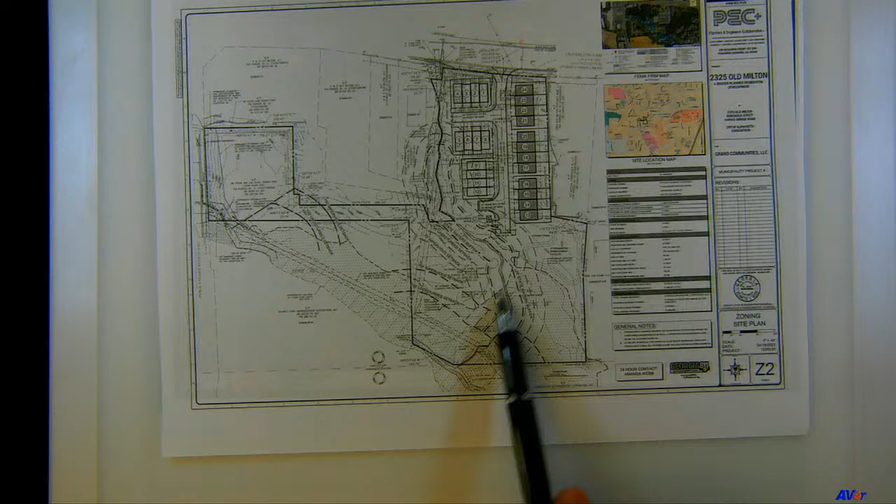I'll take you to the site plan. So there's a perennial stream that runs approximately in this location that has buffers that encroach on this property. And then there's also a non-perennial stream, the stream with the smaller buffers, the 75-foot buffers that runs kind of north-south through the property. And then this cross-hatched area throughout the property that you can kind of see in this general area, that's floodplain. A lot of impacts to this property.

The applicant is requesting to allow for some stream, buffer, and impervious setback encroachments. It's approximately 0.25 acres. They do propose setting aside an equivalent amount of buffer and impervious setback on the property, and I would like to show you what that looks like as proposed by the applicant.

So this document is part of the applicant's application. They show the impacts from the construction of townhomes on this property to the impervious setback, that's the outer 25 feet of the non-perennial stream. And then also the impacts to the 50-foot undisturbed buffer, which is the buffer right inside that impervious setback.

That totals about 11,000 square feet, a little over 11,000 square feet of encroachments. And what they show here in red is meant to be the equivalent amount of area for buffers.

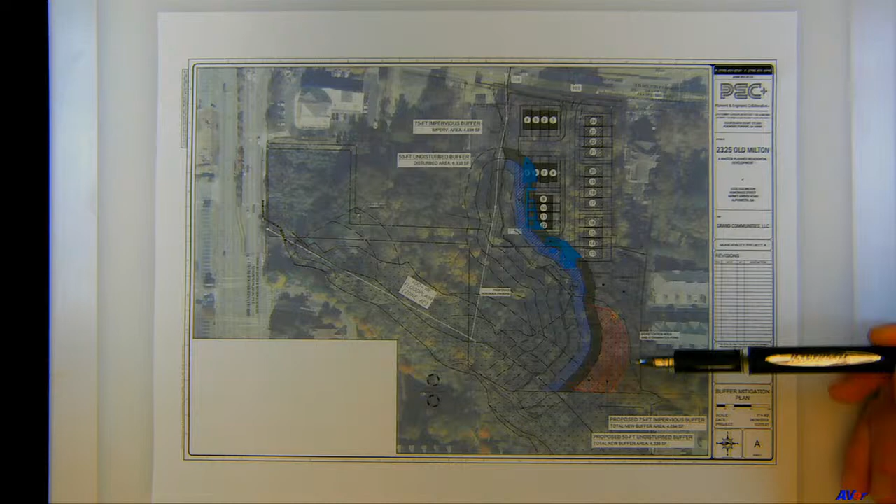We have a condition that relates to the proposed mitigation for the stream buffer encroachments, and we do indicate in that condition that this set-aside area for additional equivalent amount of buffer area should be outside of floodplain. So you can see at this area, it's actually overlapping the floodplain, so they'll need to find another area. There's another area here that's not already buffers, that could potentially be an area that they could set aside as additional buffer to offset.

Of course, we looked at the densities. The density of 3.9 is much lower than any densities that have been approved in the downtown. There are just a couple exceptions. There's one exception along the Way Hill development along Cumming Street that had a slightly lower density, but most densities that have been approved in this particular area under this zoning district, downtown live work, and along Old Milton Parkway have been closer to 7-8 units per acre.

And we'll go back to the site plan. Utilize the applicant's color site plan to go over the site plan. As I mentioned before, 24 for-sale townhomes.

These townhomes are front-loaded, so these are the ones with the variance. So half the townhomes are front-loaded, and the other half are rear-loaded. Even units 9 through 12, which front on an open space, are considered rear-loaded at this location. They have the sidewalk in the front to indicate that this is the front of those units.

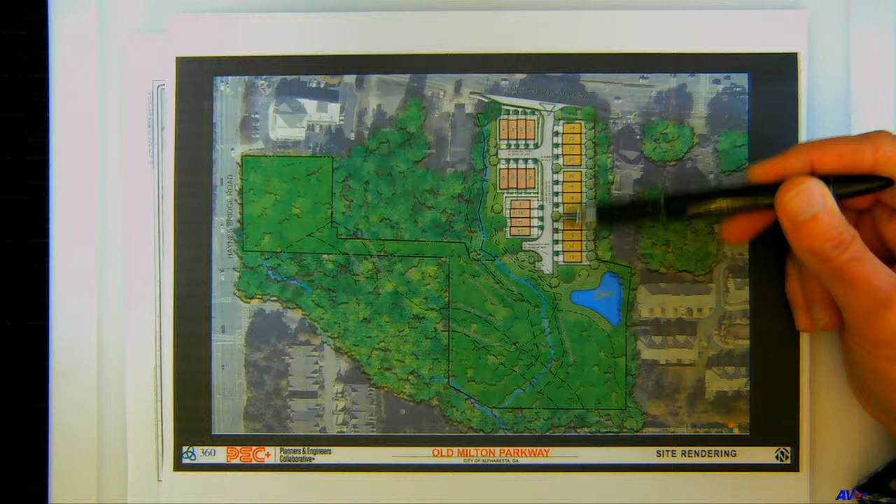As you can see from the site plan, access is off of Old Milton Parkway. The variance requests to modify the streetscape standards. As you can tell, there's a sidewalk only on one side of the street here. There's no sidewalk on this side of the street currently, as shown on the site plan.

Quickly just go back to this site plan. This site plan does show a 10-foot building setback along Old Milton Parkway. The downtown live work zoning district does allow for a minimum 10-foot setback.

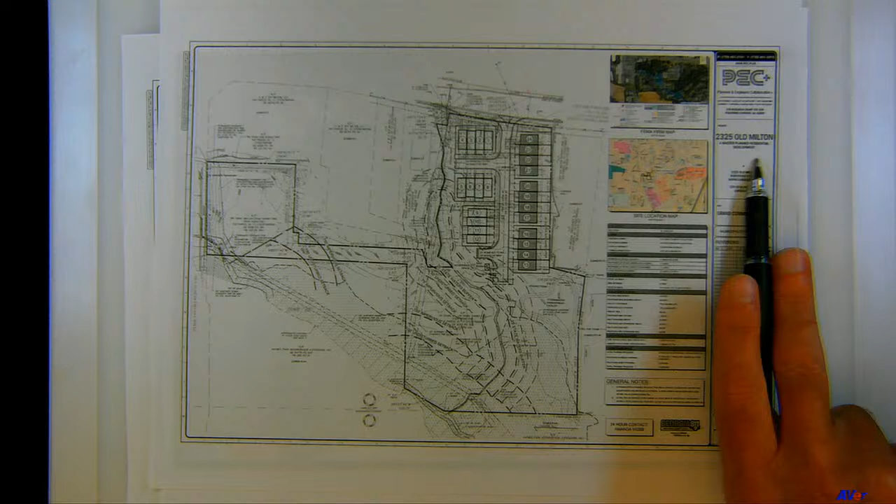However, we have placed conditions on most developments along Old Milton Parkway to have the 20-foot setback with the 20-foot landscape strip. The only exception to that is the Chelsea Walk development, a couple parcels over from this along Old Milton Parkway. They actually touch back here on the lower end of the property. Chelsea Walk was approved with a 15-foot setback on Old Milton Parkway with a 15-foot landscape strip.

Chelsea Walk was one of the first to be rezoned under the downtown live work along Old Milton Parkway. All other developments that have been rezoned along Old Milton Parkway in this area have the 20-foot setback with the 20-foot landscape strip.

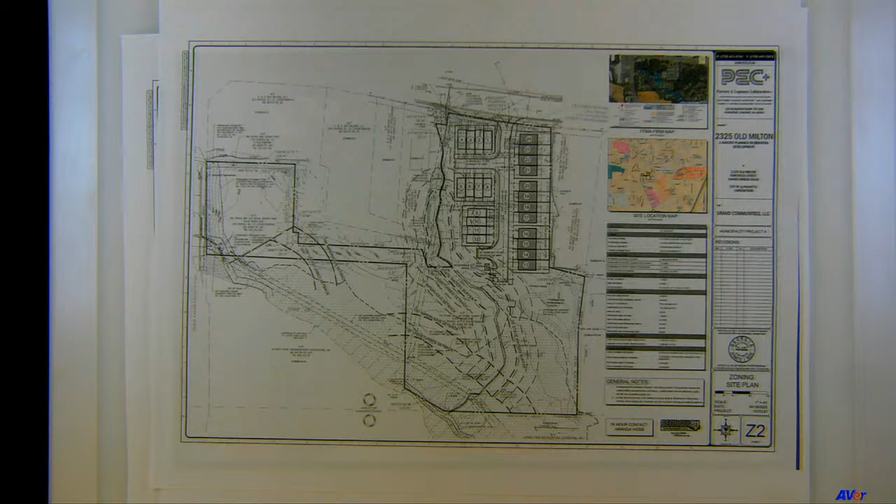The rear-loaded units, so these units here, go back to color. These units here, the rear-loaded, are 20 feet wide. The front-loaded are 24 feet wide townhomes.

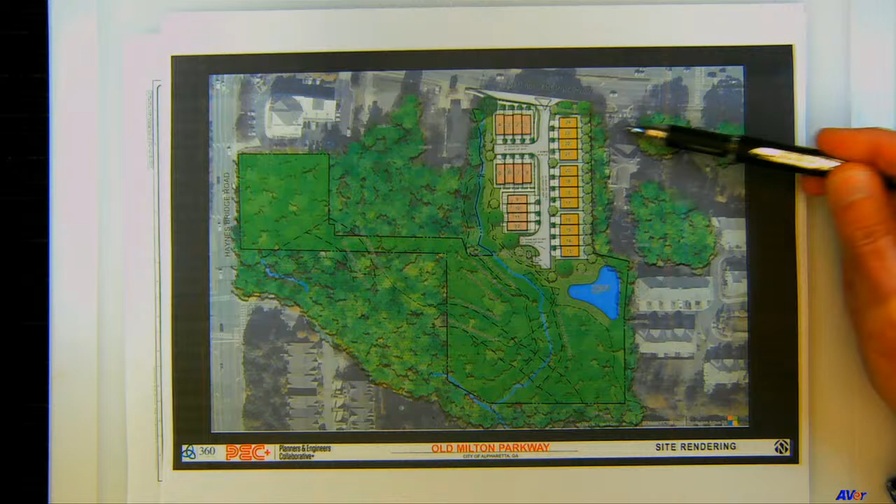The applicant does show a 20-foot planted buffer along this property line. There's an existing plastic surgery office building at this location here. So this was offered by the applicant.

In our code, if we were anywhere else in the city except for the downtown, we would require the for-sale development to be responsible for the 50-foot undisturbed buffer. Remember, we require buffers between residential and non-residential, and typically the buffer is going to be on the non-residential side of the property. We did change the code in the general UDC so that if a property rezones for sale and they're adjacent to commercial, they have to provide the buffer.

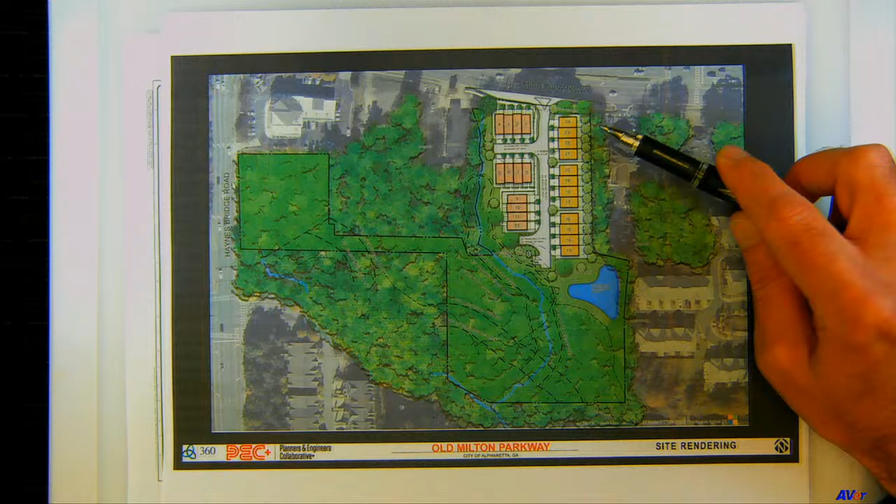We did not change that code for buffers in the downtown. So they do not have to request a buffer variance for this side or for this side where they abut non-residential. Buffer is not required there only because the property is in the downtown. But they are showing a 20-foot planted buffer here, and we do have some conditions for a row of evergreen shrubs to buffer them from the adjacent daycare.

Each of the townhomes has the code-compliant 2 side-by-side parking spaces within the garage. They also have the code-compliant driveway, 18-foot long driveway with 2 additional spaces. Downtown code would require a total of 60 spaces, so 2.5 spaces per unit - 2 spaces per unit with a half space addition for guest parking. That again calculates out to 60 parking spaces.

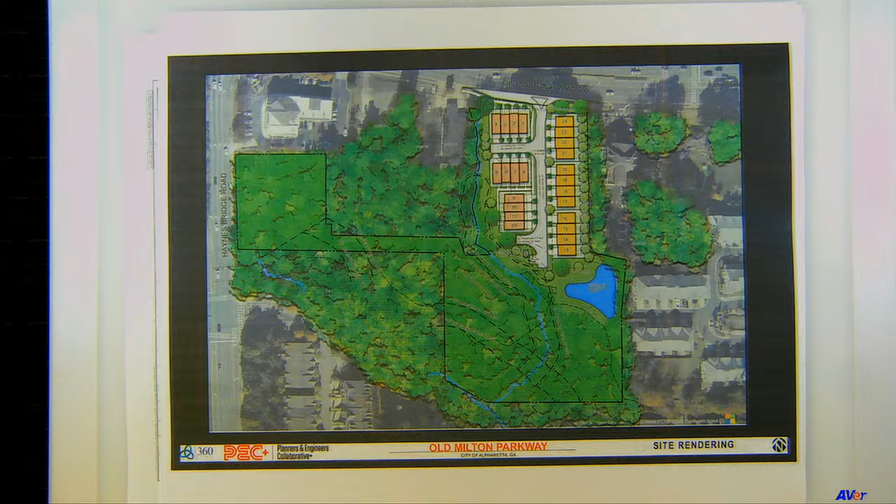There are 98 parking spaces on the site, 96 of which will be in garages and driveways, and 2 additional guest parking spaces at the end of this street near the mail kiosk.

The applicant identified on the site plan 1.35 acres of open space. That's 22% open space. A total of 20% open space is required in this zoning district, 10% amenity and 10% civic. There are 2 pocket parks that are identified on the site plan.

There's a pocket park identified in this location as well as here near this stormwater pond. They also propose some bioretention area, and I've been told by the applicant that it's both a pocket park, a bioretention area, as well as a stormwater management facility. So all 3 of those things will be occurring in this location.

The applicant indicated on the site plan that the civic space would be addressed with a creekside greenway. That's not particularly called out on the site plan. However, we did believe that there was sufficient area for them to meet the minimum requirement for civic space.

So even though they're not depicting a trail or something within the creekside greenway, we do believe that they can meet that requirement for open space.

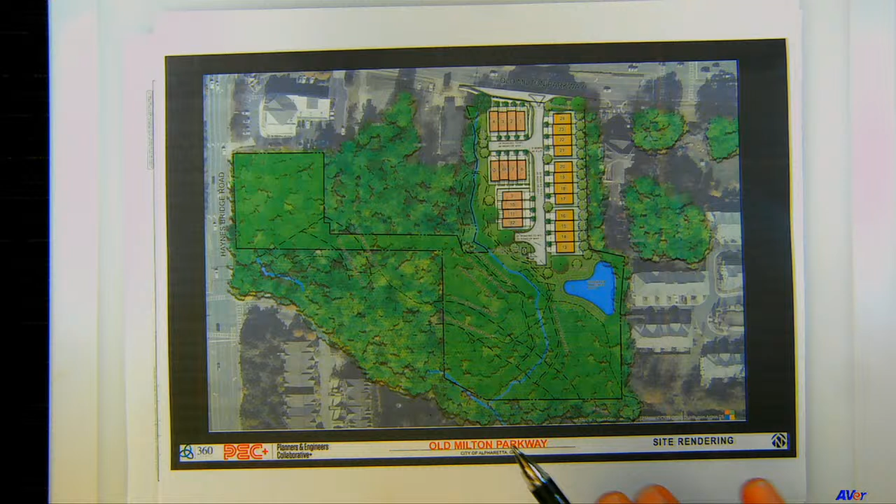There are 24 specimen trees and trees of quality called out in the applicant's arborist assessment, and of those 24 trees, they're only requesting to remove 6. Remember, there's 3.1 acres of stream buffer and floodplain on the property, and all the trees in those areas will remain as well. So there's quite a bit of tree save that will occur on this property.

And then, as I mentioned, the stormwater pond is in this location, and there's a bioretention area proposed near that.

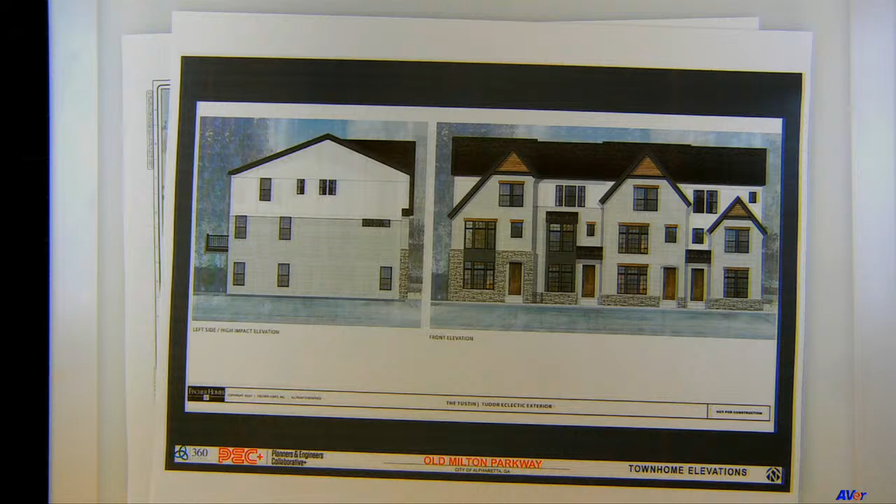The applicant proposes 3-story townhomes in the Tudor eclectic style, which is an approved style in the downtown. The elevations I have on the overhead show a rear-loaded example of the product, combining brick with stone, board and batten, and siding accents.

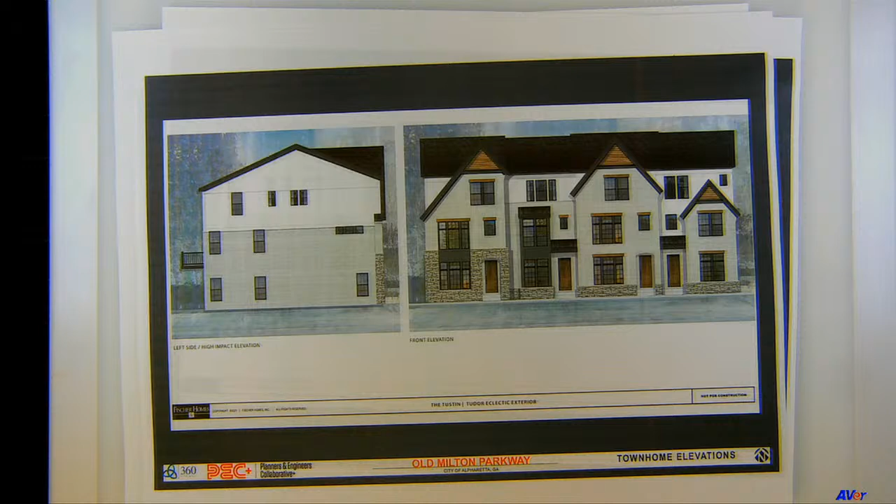When we looked at this application, we looked at the established review criteria for rezoning and variance. We do think that the zoning proposal is consistent with the vision of the downtown master plan as well as the future land use designation of the property. The proposed density is well below densities that have been approved in the downtown.

We do recommend, if approved, that we see the building setback and landscape strip, the 20-foot standard that we have previously approved along Old Milton Parkway.

As I mentioned in the staff report, one of these is incorrect. I did say it is consistent with the setbacks and landscape strips at the Foundry, Chelsea Walk, Wellstar, Northside Hospital, and 1 Alpharetta City office buildings. All of those have 20-foot building setbacks and landscape strips except for Chelsea Walk, which is actually 15.

As it relates to the variance request, we believe there are exceptional conditions on this property due to its unusual shape, topography, and presence of stream and floodplains. As I mentioned, 3.1 acres of the property is unbuildable due to the presence of stream and floodplains.

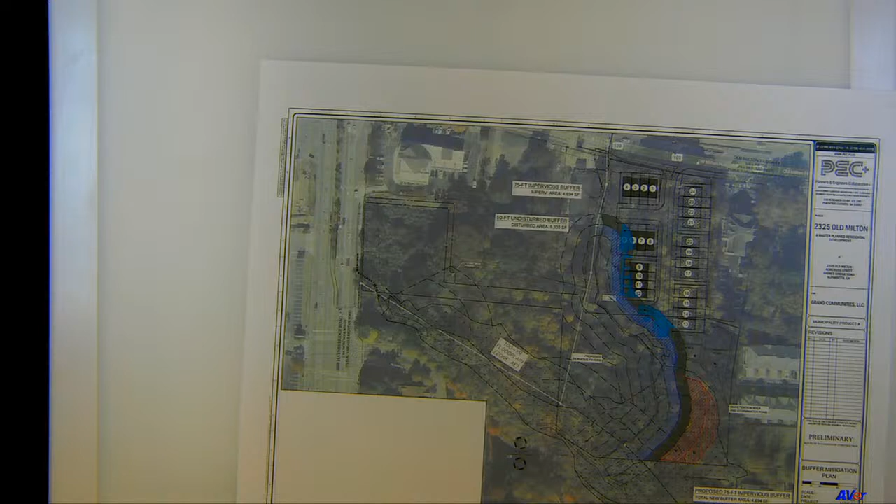There is an additional sentence added to the end of condition 1, which states any development proposed on the property fronting Haynes Bridge Road shall require site plan approval from City Council. I know there's been a few questions about the portion of the property along Haynes Bridge Road. There's no development proposed here currently by the applicant, so we added that sentence to condition number 1 so that if future development was proposed here, it's not just done administratively, but has to come back to council for approval.

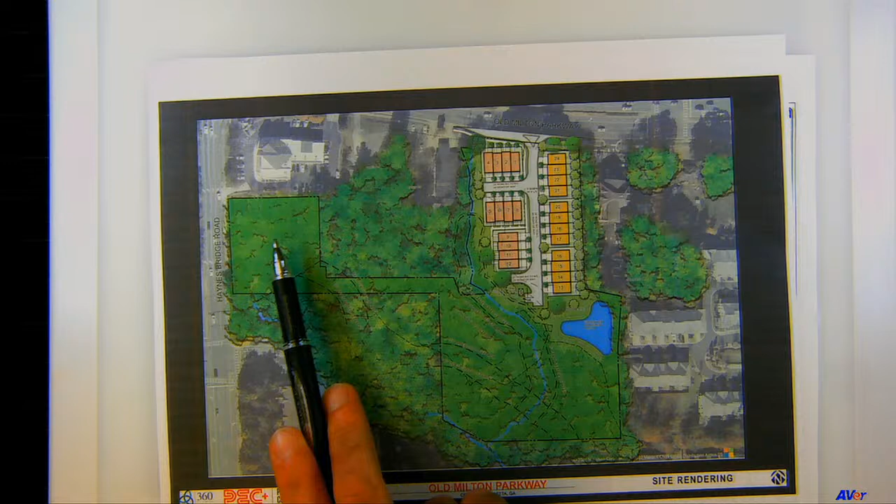Condition 2 ties the architecture and materials on the elevations and renderings that I showed to you, and also states DRB approval. Townhomes shall have 4-sided architecture, materials, and details. The townhome side elevation facing Old Milton Parkway shall have a porch or other significant projection to give the appearance of a front elevation as approved by DRB. So that's specifically talking about this side elevation facing Old Milton Parkway.

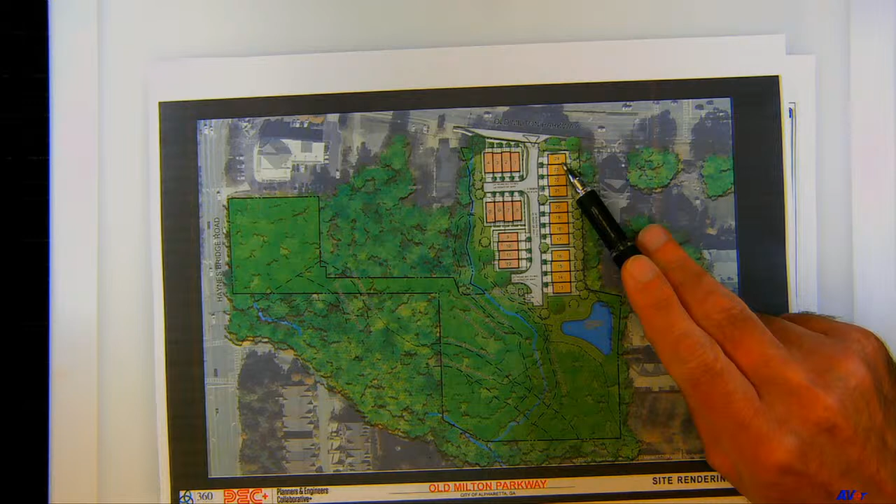Condition 3 addresses the density. Condition 4 allows courtyards to encroach into landscape strips, contingent on meeting the minimum landscape material requirements as approved by staff. Condition 5 is the streetscape requirements for Old Milton Parkway, a 4-foot planter planted with street trees.

Of course, that's subject to GDOT approval. This is a GDOT right-of-way, so they do have to approve those trees, and they typically don't like trees in their planters. Minimum 8-foot sidewalk and decorative pedestrian lighting with final approval by staff.

Condition 6: streets, alleys, and sidewalks internal to the site shall be developed as depicted on the site plan prepared by PEC, dated 4/19/22, with final approval by staff. Decorative pedestrian lighting shall be required throughout the development. Internal streets and alleys shall be private and maintained by the HOA.

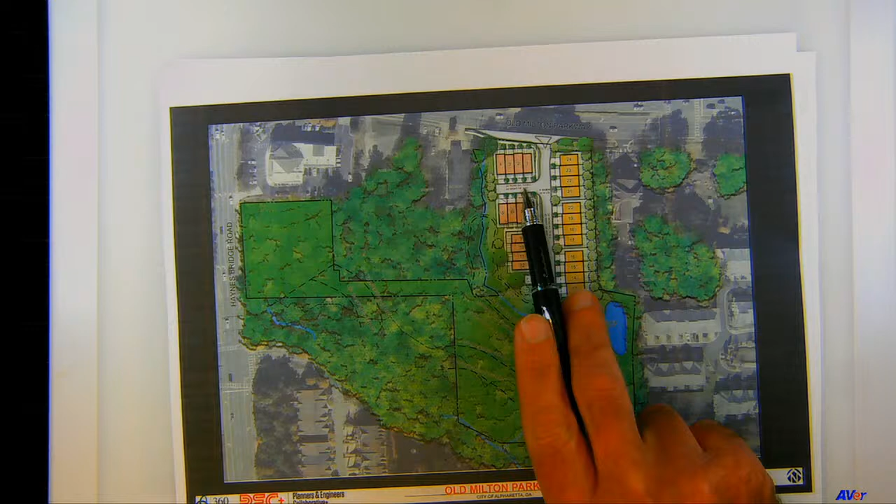Condition 7: a minimum 10-foot landscape strip shall be required along both sides of internal streets, not including alleys. This is the only alley here, so the 10-foot landscape strips are along the street here.

We do have the caveat in the second sentence of condition 7 due to the issues we're having with Fulton County right now with regard to unencumbered easements for water lines. We have that sentence in there to address that condition. Condition 8: a minimum 20-foot landscape strip, building setback shall be provided along Old Milton Parkway.

Of course, the landscape strip shall have shade trees, a continuation of what's been planted and designed in the downtown. Condition 9 addresses the 20-foot planted buffer along the east side of the property, tying it to what's shown on the site plan. The second sentence of condition 9 asks for a double row of evergreen and hardwood trees and shrubs to be planted along the east property line in this location here.

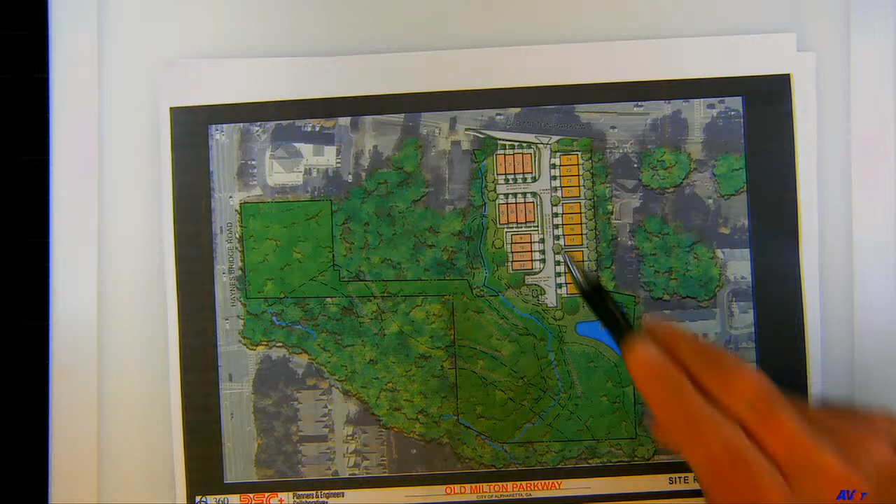Condition 10: the project entrance shall include a decorative paver apron, landscaping, decorative low wall, and/or fencing with columns as approved by staff. Condition 11: open space shall be developed substantially similar to the site plan prepared by PEC, dated 4/19/22, as approved by staff. Open space shall be developed with a park-like setting with decorative landscape, hardscape, and seating. Landscape shall include plant selections promoting the historic district. Condition 12: creeping vines shall be planted to cover retaining or low walls as approved by staff.

Condition 13 is the tree condition. Since they made their request based on the trees they were removing, we identified the specific trees that could be removed—no other trees other than these.

Condition 14: fences and walls visible from the public right-of-way shall be decorative as approved by staff. Unfinished wood fences and decks shall not be visible from the street. Condition 15: HVAC and similar equipment shall not be visible from the public right-of-way.

Condition 16: garbage pickup shall be from within the development. Condition 17: no more than 10% of the residential units shall be permitted to be rented, as recorded in the HOA's declarations and covenants. Condition 18 is the stream buffer impact mitigation condition.

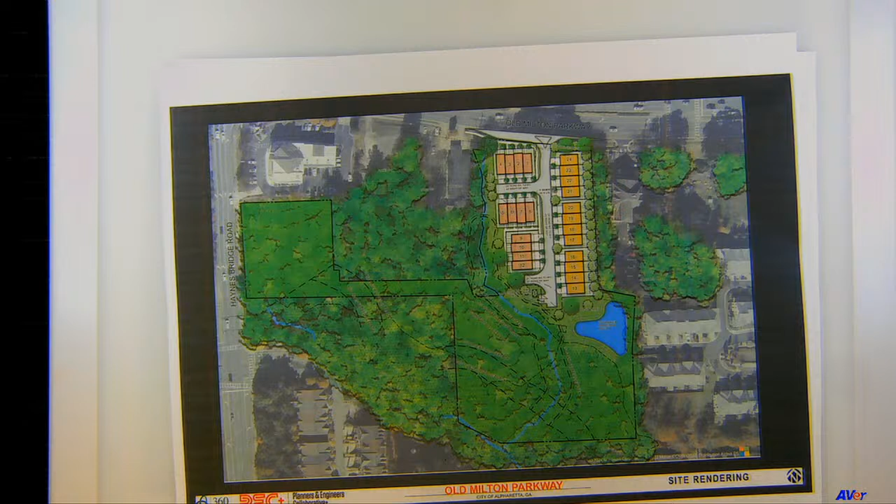Thank you, Michael. I just want to make an observation very quickly before we ask questions, regarding the eloquence of our staff in presenting an application like this. It's not an easy job to be so thorough and so detailed and eloquent in your presentation. So I appreciate the way you and Kathy and everybody else presents. That's much appreciated. Are there any questions for Michael?

Michael, I just got a couple of questions real fast. One, just from a technical point of view, you didn't put 24 townhomes into all the conditions—you have a discussion. I know you limited it to 3.9 units per acre, but you didn't define 24 in the conditions. I was just wondering, was that intentional?

We typically base it on the density, and that will get you back to the 24. It's also limited to the site plan too, which shows the 24 there. So that's why we didn't specifically call that out.

I didn't know. And then going back to the square piece on Haynes Bridge, do you know what that acreage is? Because it kind of affects density at the end of the day. You look at the 24 and it does have a lot of circumstances. I'm not saying I don't understand there's a lot of hardship on the property, but it just looks like someone's going to come back and create commercial on that, right?

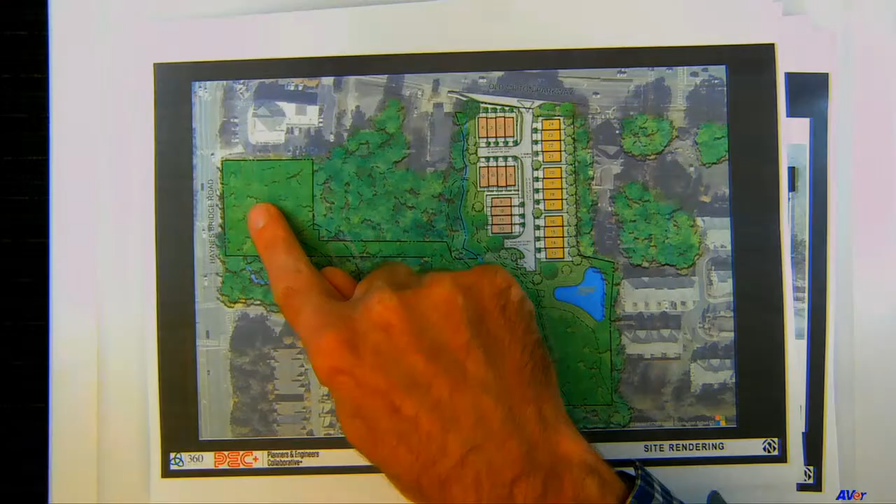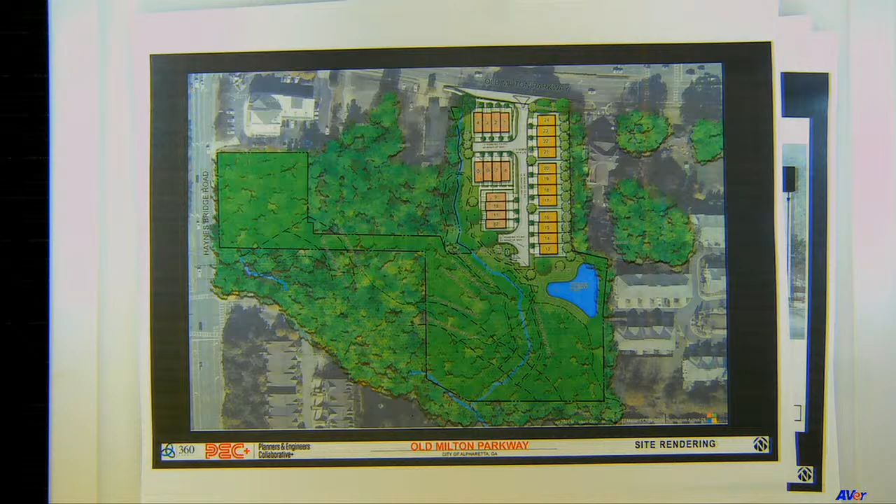So that's a little bit misleading—well, I shouldn't say misleading, but there might be development coming on this parcel in the future, which may increase the density. I was comparing this with the other developments in this area; it's like the third lowest, and that's why I thought maybe it wasn't. It's just based on the total area of the property, so the commissioners can note that. All right, any further questions?

Question on the stream and the setbacks, the buffer setbacks. I didn't see anything in the report so it must not apply, but part one is: is any of that stream supposed to be piped, or do they just want to encroach closer to the stream? None of the stream will be piped as a result of the encroachment that they're requesting.

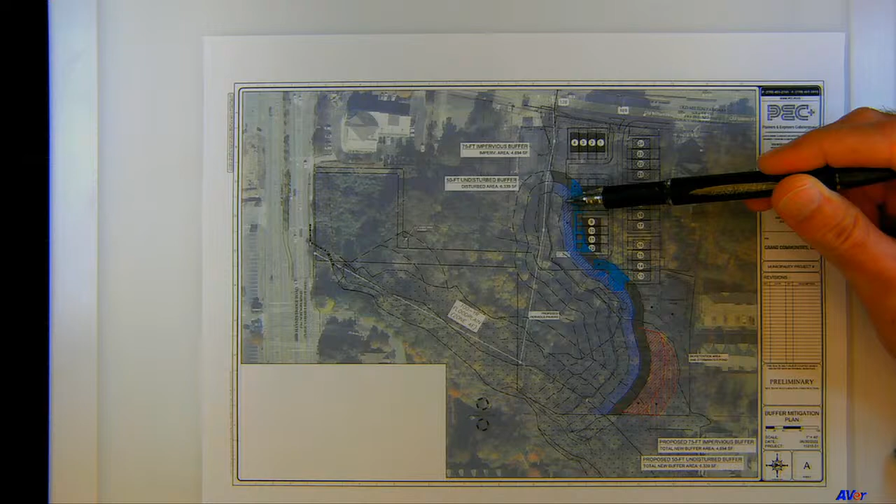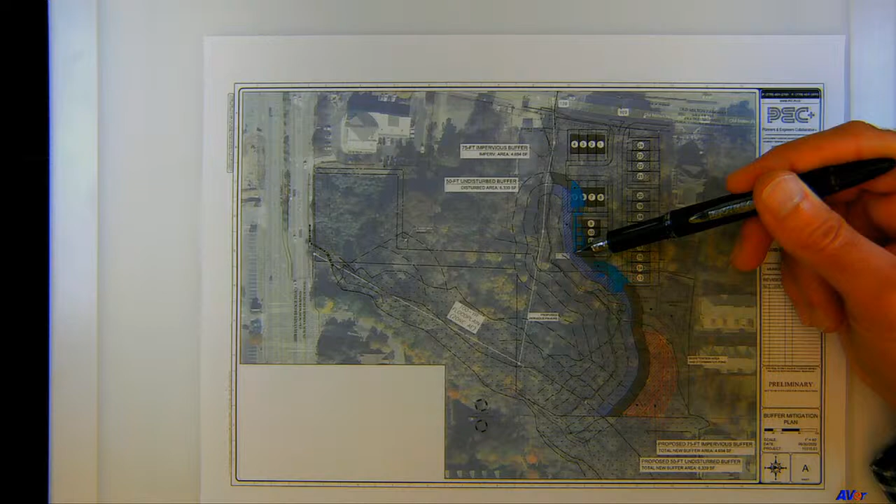So all it means, Commissioner Perkins, is that in this area, for example, they call out the areas where they encroach. This outer 25 feet is referred to as the 75-foot impervious buffer, and then the 50-foot buffer is the next lighter blue area. They show the encroachments just to determine the total amount of encroachment in those areas, but basically the buffers get less in these areas, going down to the point where they stop the encroachment, and they'll find other areas to make up those buffers on this property.

One of the other things—the neighbors had indicated in one of their letters that there's some flooding already. Has that been brought to the city's attention? Has that been discussed at all? There was, I mean, it was in a letter. Other than what we received from correspondence—email, letters, or things stated at the community zoning information meeting—I don't have any knowledge of particular flooding in that area, and it was not brought up by our stormwater engineer as part of her review.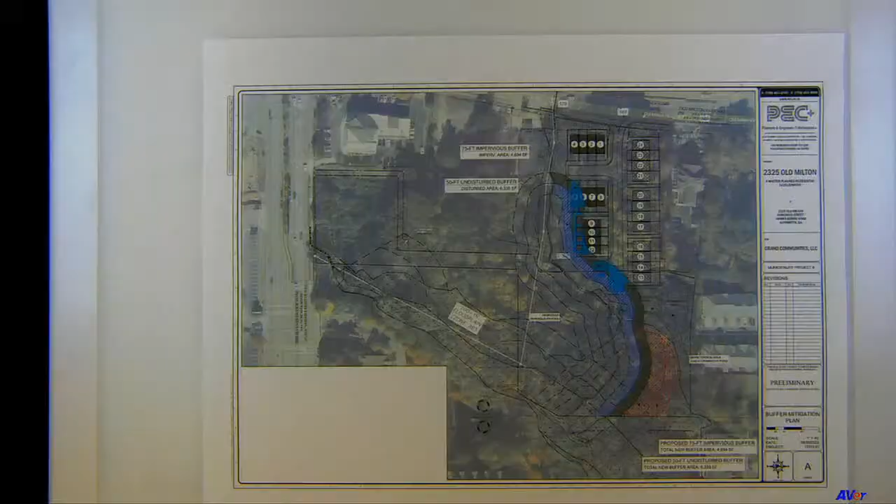I just had one follow-up question, Michael. So in this plan, I understand that left parcel on Haynes Bridge, but there's no access being granted up through there for this development? We're not touching that whole side—there's no road improvement on that side. It's completely left alone. They're not proposing access here, whether vehicular or pedestrian, at this time through this area.

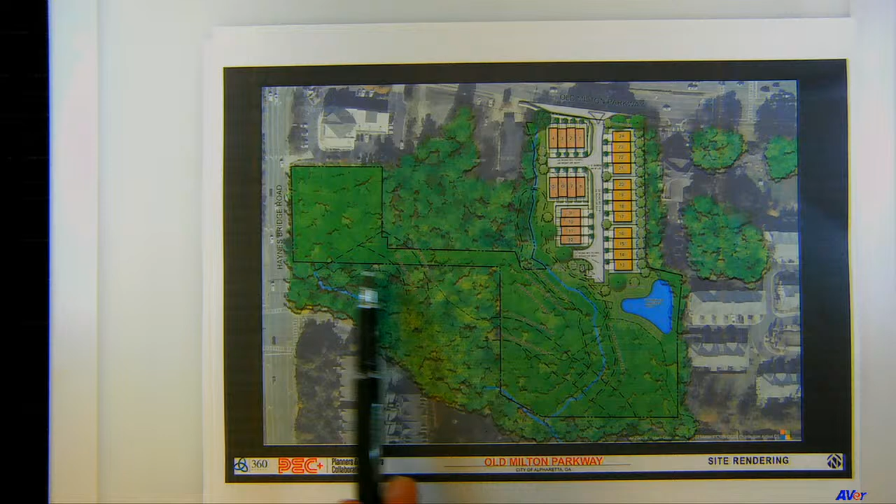And is that a normal condition where you added that sentence on number 1? I haven't seen that before. We have—I've found some old zoning conditions that include that, and it requires... there may be some undeveloped land on a particular property. Does that happen on the regular, where we have developments where portions of the property are left undeveloped? Usually we see the full build-out on a site plan like that, but there are some instances where we've had that, and the condition will specify that new site plans would have to go to council.

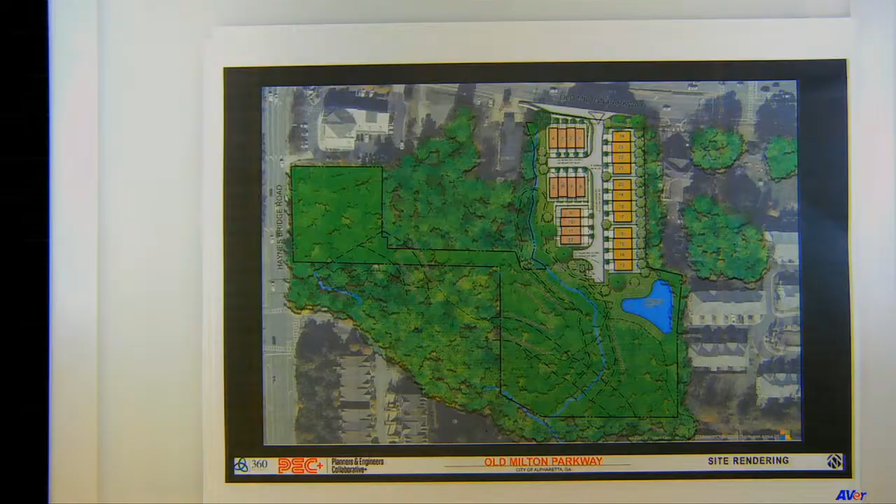I also have precedent within our master plans—there are master plans that require site plans, where there wasn't a site plan at the time the master plan was approved, to be brought back to council for approval. So that would skip the planning commission process and go straight to city council? It does, technically. Now, we could certainly make a change to say planning commission and council—I don't see a particular issue with changing number 1 if we wanted to do that. That was just an oversight on my part; I was going back to those master plans where it said just go to council.

Yeah, I think it concerns me because it does significantly change the density, and that would be something that I would definitely be interested in pursuing.

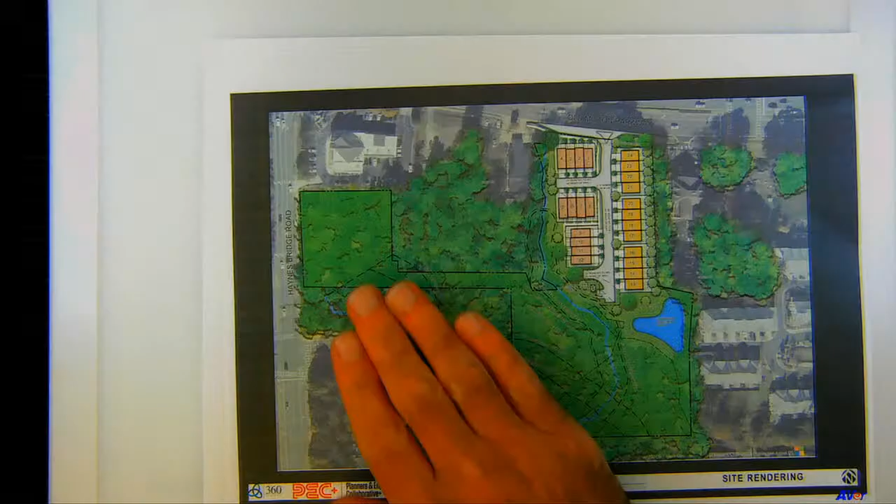Yeah, I mean, this could be more townhomes. It could be under DTLW. You're allowed residential and office, basically. There's residential uses, detached, townhome, condo that's allowed under that zoning district. Could be a lot of things, or office. Now, retail uses, there are very light retail uses where you can seek a conditional use in downtown live-work, but those do require a conditional use for any kind of retail use or restaurant.

I have to say I'm struggling with this when I'm looking at the plan, taking the entire plan into consideration. Obviously it's not a large master plan, it's a residential redevelopment, but having that hanging out there as a potential development, I'm trying to reconcile how that works, because I don't recall ever having that type of a circumstance in my experience.

I like what I see in the current plan, and a lot of it is because of the density that it represents in the downtown area. But if that entire acre were to go away and not be factored in here, it would change, it would have an impact probably on my overall decision here. So I'm just talking about this. It's just very unusual, for me anyway, but I do have a few other questions, Michael, to ask you about.

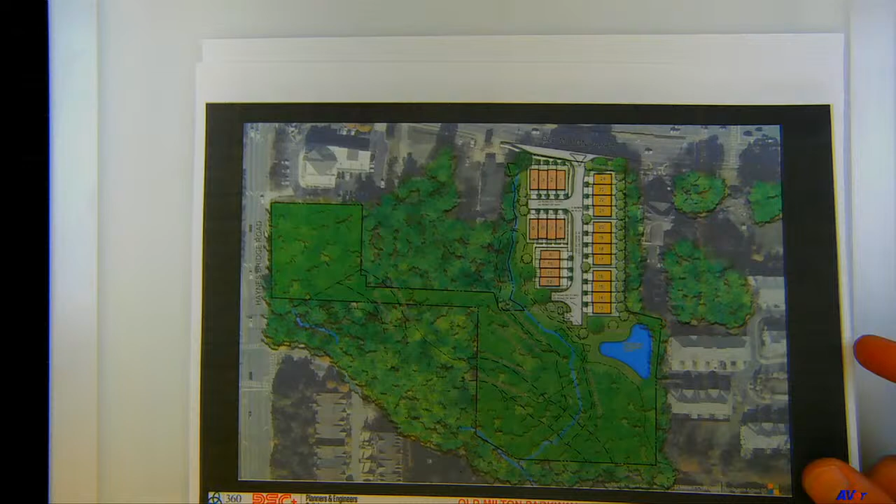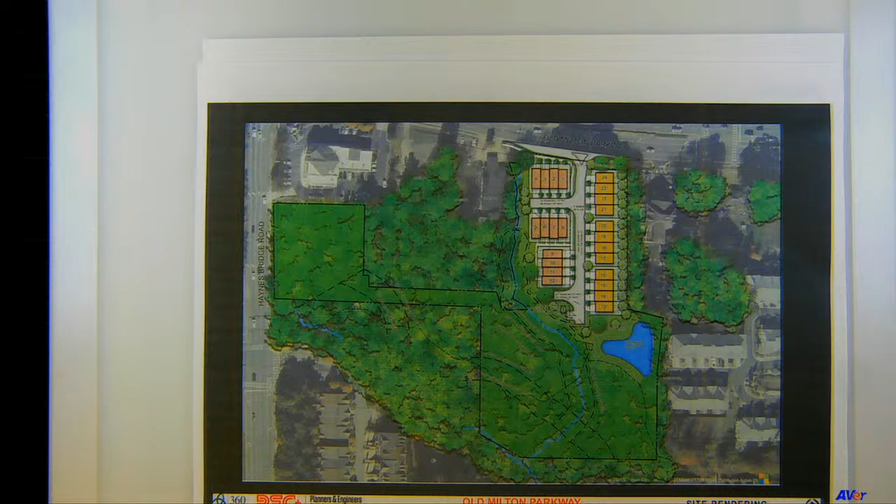I think what this board as well as council is used to seeing is we usually have a site plan that will have areas of the property in different colors, one representing amenity space, the other representing civic space, and then they'll show the improvement, how those areas are going to be improved. They may just put a label that says pocket park, or they might actually show a trail system going along a stream or something like that. That is not on the applicant's plan.

I do think I did send them a question about that, and I do think they are ready to respond to that question this evening. So I would imagine that in their response, we would probably want to add some specifics to the condition, because we're typically used to seeing what type of trail, what the material of the trail and the width and so forth. So, all right, you may want to consider making a little addition to condition 11 about that, yes.

My other question is regarding the detention pond area. We received a number of letters, and one was from a resident in Chelsea Walk. If I remember correctly, they are in perhaps the building line that will be closest to the detention pond. I see that there's greenery, but I don't see any details in the application about what type of screening is expected to happen between the Chelsea Walk residential development and the pond. Do you have any specifics concerning that?

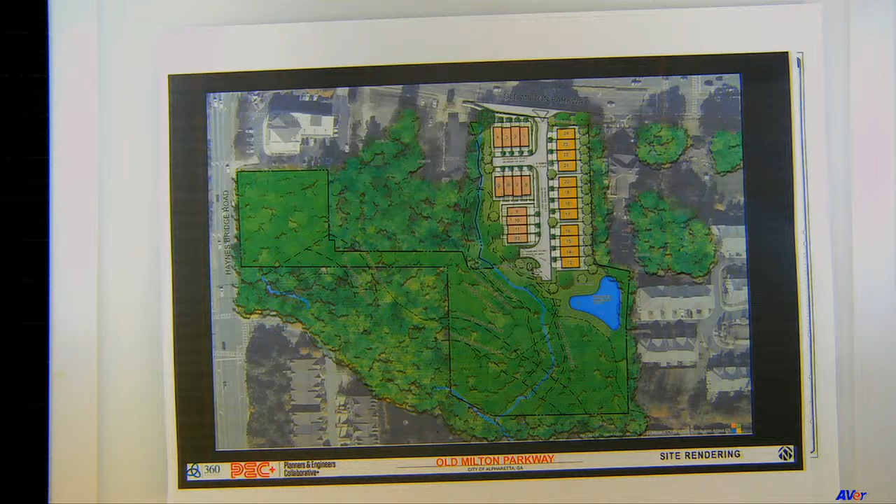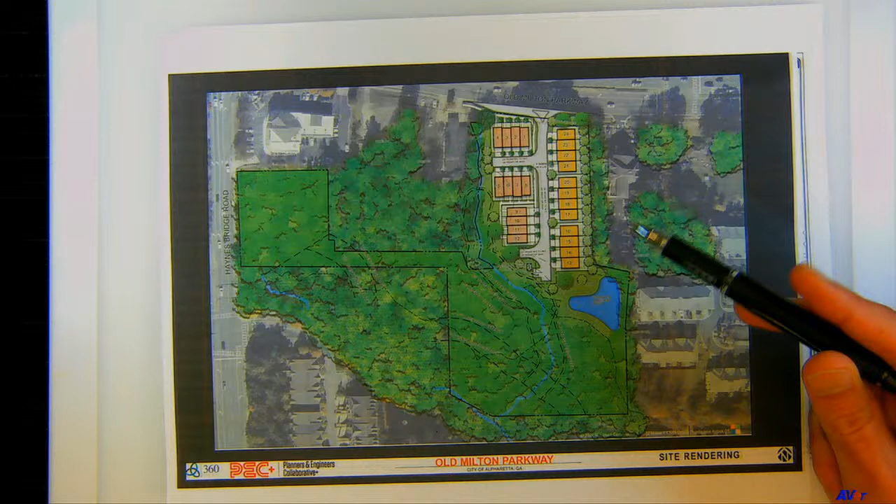Yeah, so that's not addressed in the conditions because it's a code requirement. We have a code requirement for a double row of evergreen trees around a detention pond, so that would be the requirement here. There is going to be, around the pond, a 10-foot access easement so that pond access can be gained. But outside of that will be the double row of evergreen trees and shrubs around the pond.

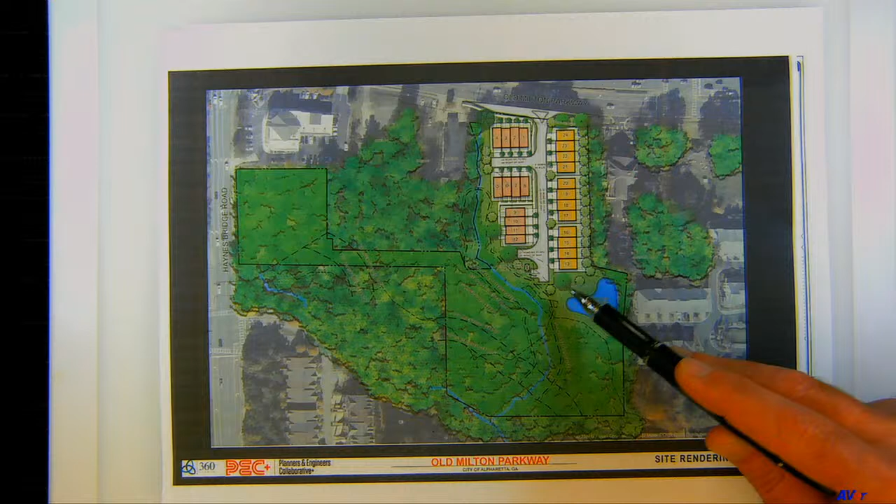Around the entire pond? Okay, in this area as well. So it's to screen it from adjacent properties. So, in this area here, the fact that they're doing a bioretention area and pocket park means they may not need to screen in this location, because that may connect with their pocket park. They may want to make that an amenity. But definitely, as it relates to the adjacent properties, it would have to be screened in this area.

Understood. Thank you. Yep.

This might be premature before the applicant presents in the public meeting, but I think the last sentence of number 1 should be modified to reflect that. New proposed development within the undeveloped area shall require approval by the city. Approval by the city means it has to go through the public process, come before the planning commission, because the planning commission does not approve, it recommends, unless I get better wording.

Would you accept putting public hearing in front of approval, public hearing approval from the city? If it means the same thing, approval by the city or council, that's fine. I didn't want anyone to misconstrue it as approval by city staff, because we think this should go back through a public hearing process. Yeah, that's fine, that's what I wanted. Agreed.

And is it understood that it's planning commission and city council? Because there are public hearings that don't go to planning commission, there are public hearings that don't have to go back to planning commission. You may want to think about specifying that in the condition. Okay, it's a recommendation to the board for when we get to that point.

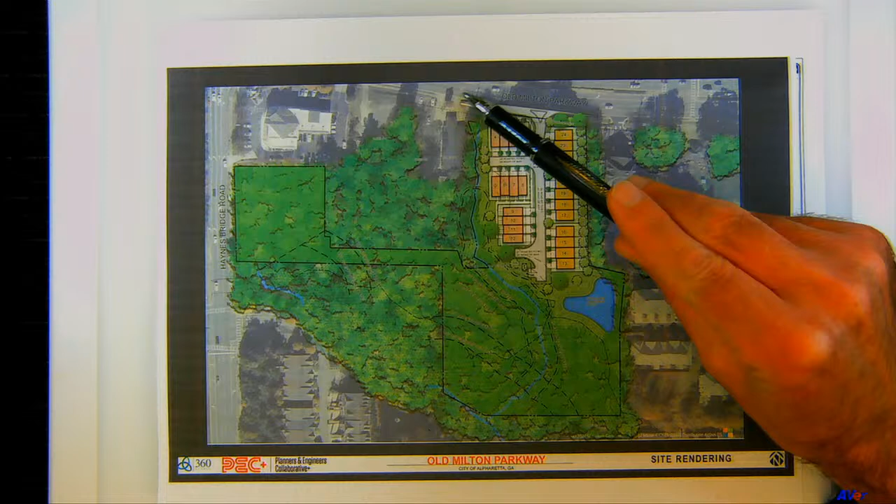Do we have any other questions? I do. I just have a quick question, did I hear you say there were or were not sidewalks in this site plan? So there are sidewalks along the frontage of the property. In fact, I believe the applicant is willing to extend the missing sidewalk further to the east in exchange for impact fee credits. They do have sidewalks on one side of the street through the development, and there's also some sidewalks in this area for these units.

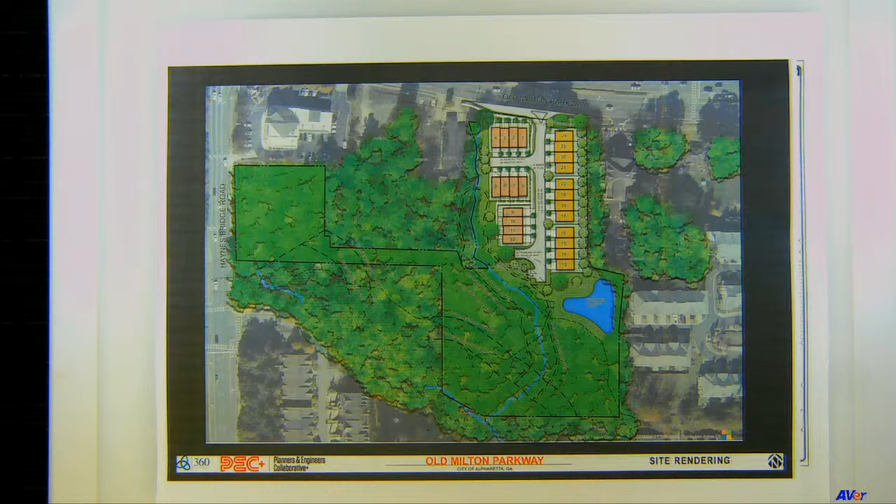And as far as additional parking spaces, so the only additional parking spaces other than the driveways are the 2 by the mailbox. That is correct. And 1 is a handicap. Is that correct? That's what they showed. Yeah, it is. So really, for most people, it's going to be 1. Okay, I'll talk to the applicant.

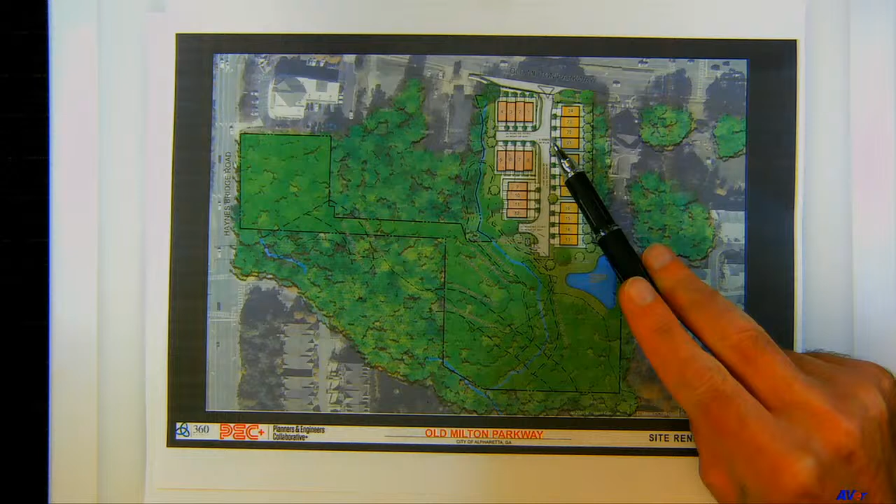One last question. When looking at that, this would have to meet code, but if a fire truck came down the street, of course they could come down the street, would they be able to turn around in that little area? Is that going to be big enough for that? Yeah, so this was reviewed by the fire marshal, and they do have a compliant turnaround in this location. So that's what this is right here, if no one's parking there.

Thank you. Any other questions? All right, we're going to ask the applicant to come forward and make a presentation.

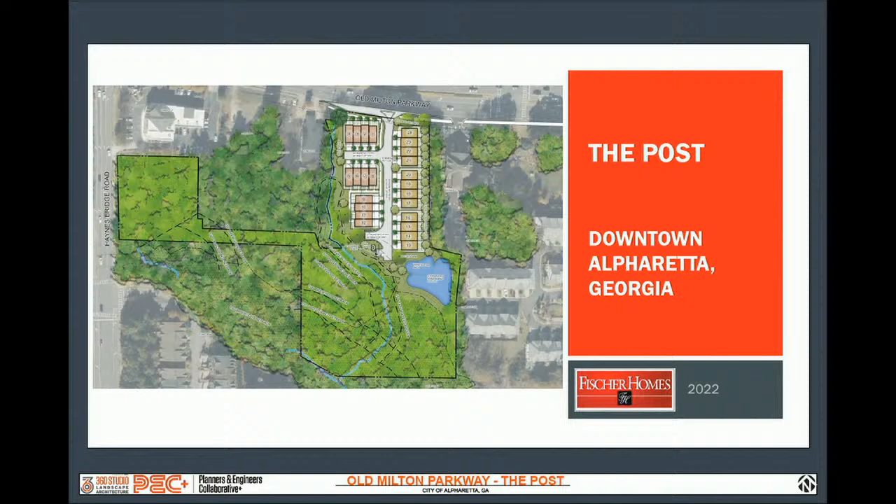So I am the Director of Urban Infill. I sit within Fischer Homes' corporate office, and I wanted to start out with a little bit of overview of Fischer Homes and Grand Communities and what we've been doing throughout the history of the community. So with that, I will jump in. If we could have the next slide, please.

Fischer Homes is a privately held company based in the Cincinnati metropolitan area, founded in 1980 by Henry and Elaine Fischer, with about 33,000 new homes constructed in 41 years of history. We are a top 30 by volume U.S. home builder and the 15th largest private home builder. And we pay particular attention to neighborhood design and architectural execution.

A little bit about giving back within the company. One of the biggest organizations the company is involved with is St. Jude's Children's Research. Throughout the history of the company, over $20 million has been raised through building 19 homes in fundraising for St. Jude's. Just this current year, we've built 3 homes in 2022, raising about $3.5 million for St. Jude's, and those homes were built in Cincinnati, Louisville, and St. Louis. Two other items contributed more at the local, metro level in Cincinnati, are providing a nursing suite at the baseball field and a family care center at the amusement park in Cincinnati.

Next, please. So there are 8 divisions within the company. Northern Kentucky is the home base, and that's where I sit. We have our office here, and also in Atlanta, Cincinnati, Columbus, Dayton, Indianapolis, Louisville, and St. Louis.

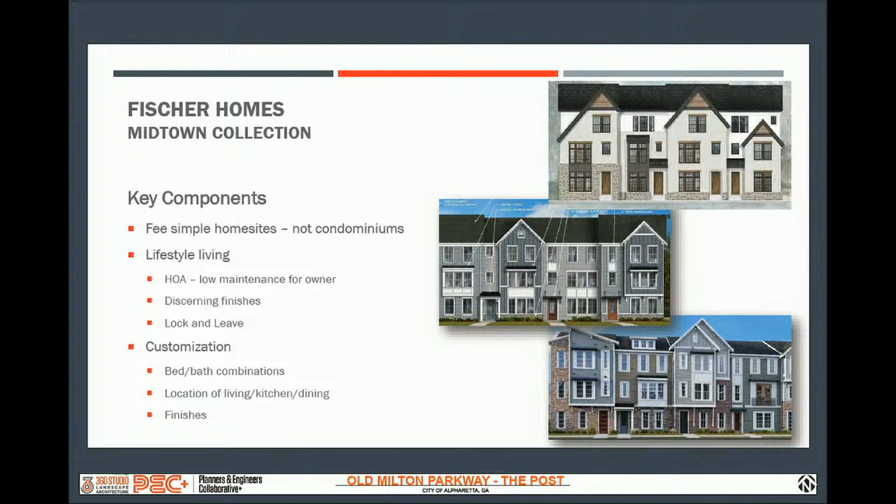So a little bit more detail. The Tustin, which is our rear entry townhome, has a primary building footprint of 20 feet wide by 44 and 46 feet at the ground level. Those have a 2-foot undulation in the front, so we're getting more articulation within the architecture at the ground level.

We have a 2-car attached garage with alley access. These have 9-foot ceiling heights, 8-foot doors at the ground level and the mid-level of the townhomes. I mentioned the 3-bedroom, 2.5 bath base, and some of the higher-end finishes within this collection. The outdoor living here includes natural area we're trying to conserve on site, plus a rear deck off the main living level for the alley-loaded units, which is 6 feet deep by about 18 feet wide.

Some of the images here show the front elevation that's been proposed and some interior images of the collection line.

The Brookline is the front-loaded townhome. That one is 24 feet wide, needs to be a little bit wider, so we're getting both garage access and the front door coming off the street in front. This one also has outdoor living via a deck at the primary living level, and that deck is 10 feet deep and about 20 to 22 feet wide, so it's a larger deck.

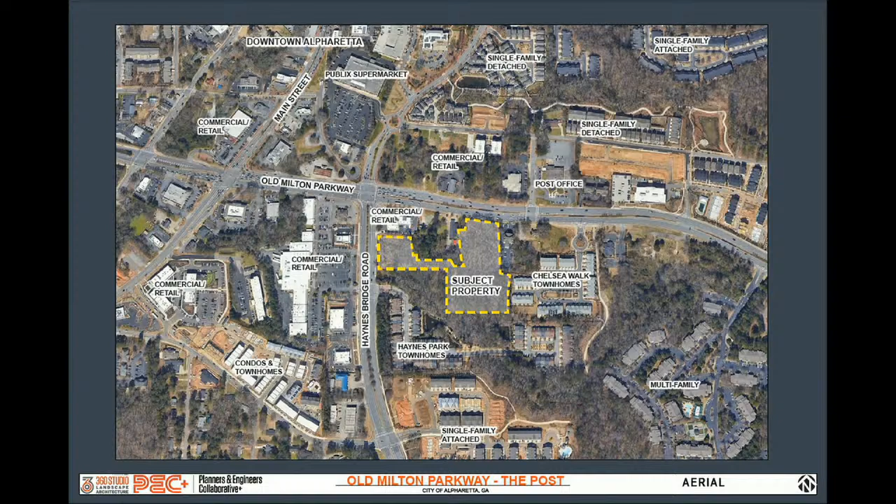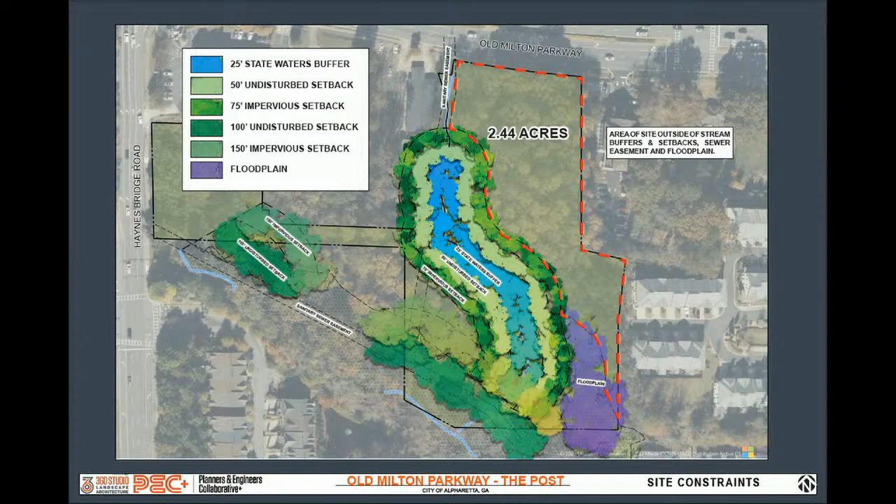So that stream that runs through the bulk of the property that we're looking to improve, which I'll walk you guys through, is a very intermittent stream, and sometimes it's very low flow running through there. If you can run it to the next one.

This shows you more of the context of what I was talking about with the existing trees. We're saving so many of the trees just by the plan of the design and the way the site is set out. So you can see exactly what we're talking about within the stream - it's really that 75 and 50 within a portion of it. We're never getting inside the state buffer, and we're never touching the stream except for the handwork I will walk you through.

The other reason we wanted to show this is when you look at the academy, my first academy, the daycare next door - they are constructed within the stream. What was next door, most likely when that was constructed, that pipe probably wasn't a stream at that time. Since then, that daycare is actually within the stream buffer as well, similar to what we're facing on our site.

If you're looking at it, these are the variances that we talked about, and it was really that stream buffer variance that we looked at because it is so constrained. When you look at the definition of variance - size, shape, topography, special circumstances - this one probably has all of them, more than I've ever seen doing work all over the Southeast, because it has so much to it, and how we can make it work but still give back equal or more than what it has today.

Then also the 5-foot and the 4-foot planter strip, and the variances for some of them to be front-loaded. I'll walk you guys through exactly on the plan about why it makes sense for those to be front-loaded. Just like a lot of the projects I've done in the city, there are just some places where front-loaded units are the best option.

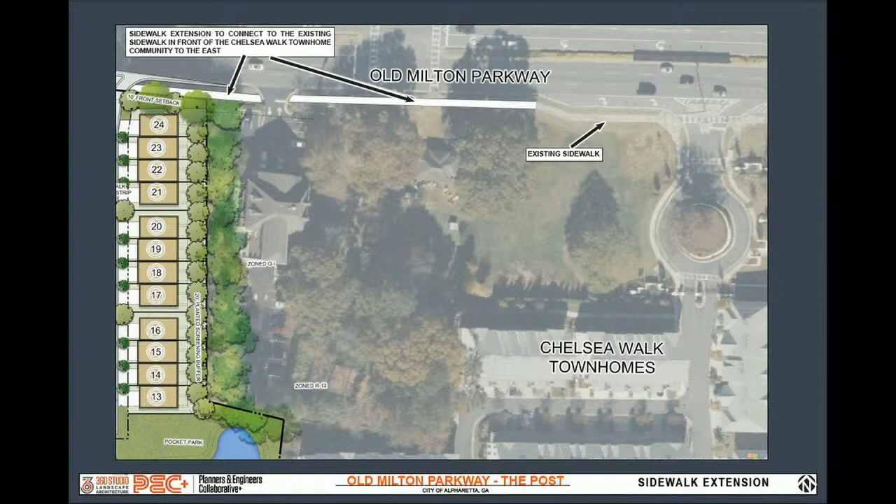I wanted to get into, on the last few slides, how we're dealing with the stream buffer and some of the areas. If you look at the green space on the site, not going off what's in a buffer or not, the site is actually 71.5% green, which is the most of any site I've ever worked on. That includes all the area from left to right, including all the little pocket parks we have and the landscape to the office.

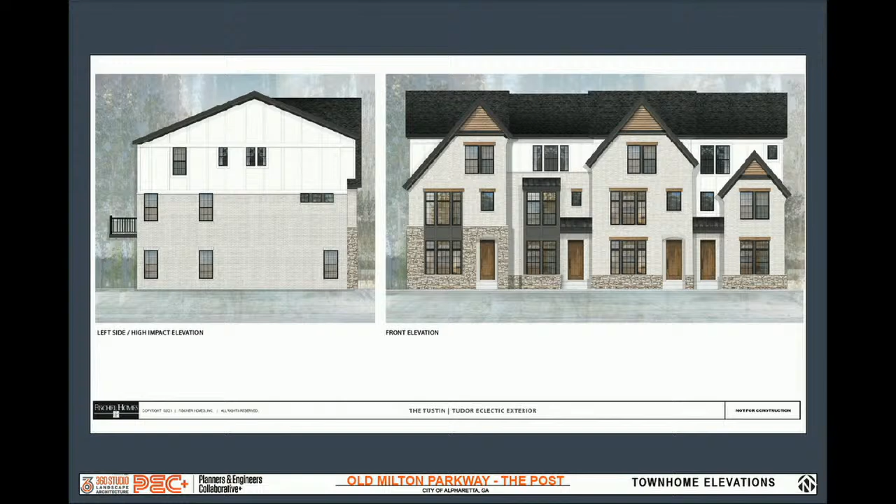This goes back to the front townhomes we had, looking at some of the different options. There's a couple more slides if you go through. Then I want to go back, can you go through the next one?

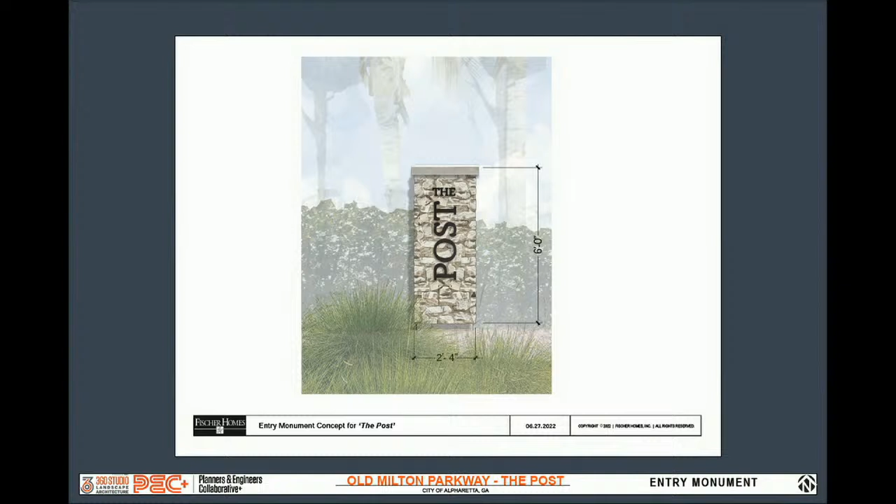This shows, as we talked about the post, the column, kind of the monument we talked about, really trying to tie that architecture into the colors and the stone from the front. If you can go back to one of the ones that shows the overall plan, the rendering, or any of them.

So there were some questions about the drainage. Chelsea Walk and the office actually sit above us, and so it all drains toward us. There is no drainage draining off of us onto anything, and everything comes down to the south to the perennial stream. I know there are some questions about how the drainage moves through there, but those are definitely not a problem because it drains all on us and everything drains basically to the southwest.

Lastly, there was a couple of different calculations I heard. The area on the left, we're not proposing - this is our application, like I told you, the constraints are severe - but if you took the 0.9 away, you still wouldn't be above 4.5, 4.6 units per acre if somebody came in there and tried to take that away, or if someone planned 4 townhomes that you fit in there, it would still be under 4. So I just wrote that down for discussion when you guys were talking. This is our application, and we don't think that left side is developable for all the reasons we stated, but I wanted to make sure you guys had the numbers if you were calculating them out.

And with that, I can take any questions you guys may have. Thank you for your time.

Thank you. You both did a very good job presenting for the applicant. We appreciate the handout - we can go back and take a look at it.

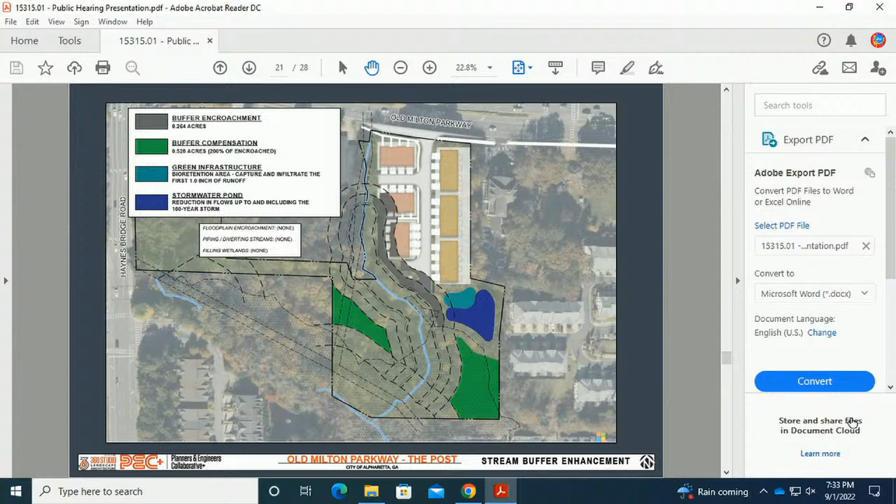First question is that you, on the very second sheet or second slide, you mentioned about the work you've done with St. Jude - 20 million raised through building 19 homes. Did you build 19 homes for St. Jude, or sold them and gave the money to St. Jude?

Yeah, and I'm not the expert in this department, but it's a fundraiser, so tickets are sold - so many tickets, and the price of those tickets are identified for each of the homes. So we're basically providing a lot, and we're building the home, and based on the tickets sold and the value of the tickets sold, that money goes to St. Jude. And then the winning ticket holder gets a brand new home.

That's very good. I like the work St. Jude does, and to see an organization that's supporting them at that level is very admirable.

So thank you. You're right in terms of if we took out the left area adjacent to Haynes Bridge, you're left with about 4.57 units per acre, at 4.6. And you mentioned that it's undevelopable, which means there is no likelihood it will ever be developed.

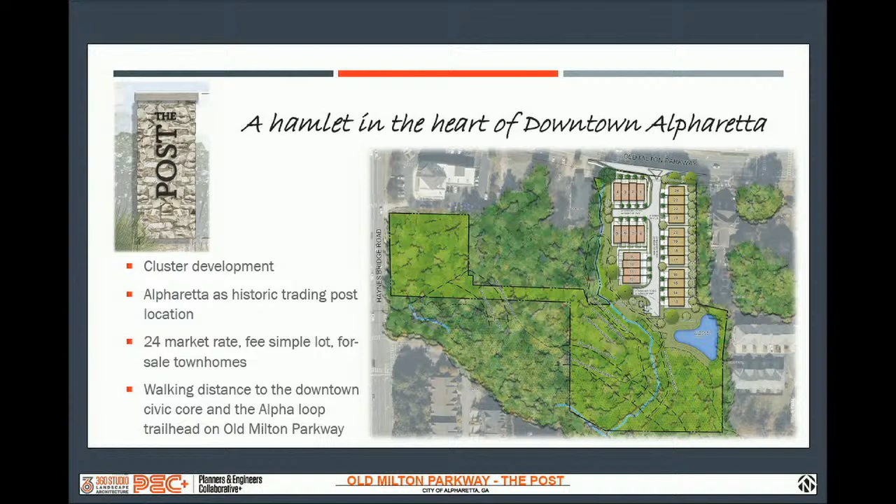Yeah, if you have the black and white plan, I think it's 3 over, maybe 6. The next one. Go back just a little bit. One more - when are we there at the topo? Yeah, you can kind of see the topography on the left.

The issue at the left side, as we were going through and looking at it, is you have the stream that's there - we show the buffers. You have the specimens on the right, you have the guardrail, and then it immediately slopes, so it sits down way, way, way below the road. That's why it's never been carved out to this day, as the downtown's been exploding, because 0.9 acres times 15 feet to get it to a commercial level is serious. And then also it doesn't connect to anything, and the access is really wonky - I don't know if you can get full access, so it's got to be either right in only and maybe right out. That's the reason - this is our proposal, and I know there was a lot of questions about it, but that's how we analyzed it. It's an extremely difficult site to deal with.

Would there be any consideration by the owner to donate it as an easement with perpetual covenants never to be developed?

We're here to listen this evening, so we will listen to ideas and recommendations and take those back and take those into consideration. Okay, well, we can't make you do that. It's just a question that you may consider, because without that, we'd have to still put a recommendation regarding potential future development to make sure that the city is protected. Those are the only two questions I had.

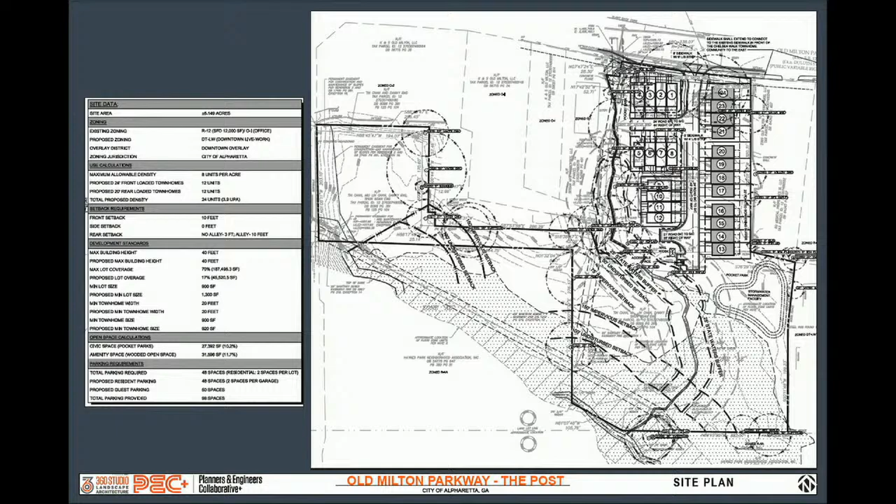Thank you. Question on the parking spaces. Do you want to address that a little bit? Because let's say I bought one of those and I have book club that night, and I have 6 ladies coming over, but I only have 2 driveway parking spots and 1 parking spot for a guest. So where are they going to park?

So looking at it, we had thought in terms of all the downtown projects we've done, we haven't really had a major issue with having a lot of different guest spaces, especially for the 24 units. If there's a specific situation, like a book club, I'm sure honestly y'all would probably pull in the fire lane and park. But with you having 2 in the driveway, 2 in the garage, and then filling up the 1 space that's there, there would be off-site parking options and then walking there or Ubering there. That's what we were proposing, because with the urban infill, we felt it was plenty of parking, but we had heard that was a question that may come up.

Well, I will share, I'm a lock-and-leave resident, so I sold the house and moved into a townhome development, walking distance from here. Our development was built in the early 2000s, before the price of land became as crazy as it is right now, so we have a lot of guest parking where I live. We average 4.5 spaces: 2 in the garage, 2 on your driveway, and then a half guest space per unit. And I will tell you, you mentioned parking battles when you were here for the CZIM. In our development, we have parking battles for guest spaces, and it's a real challenge.

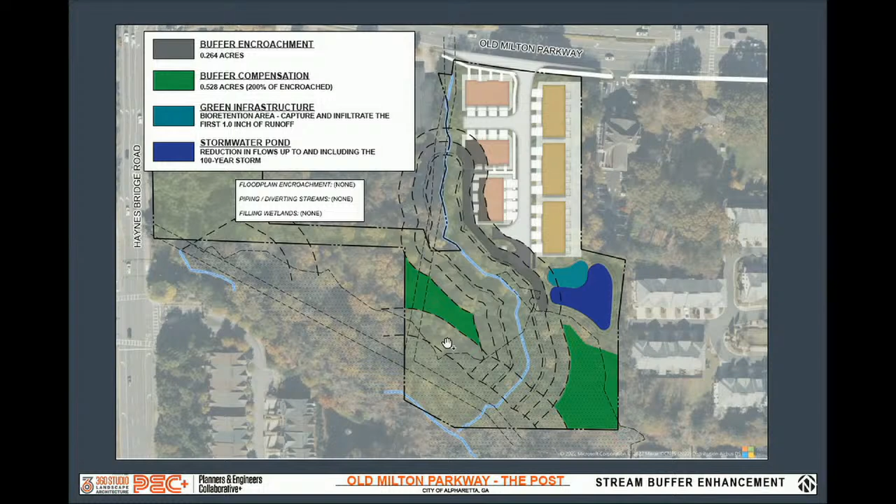The next one is on that area of the plot of land that's adjacent to Haynes Bridge Road. I hear you on undevelopable, I hear you on 14 feet down. I like Commissioner Richards' idea about conditioning that it stay undisturbed. But I'm curious, would the applicant be interested and open in concept to dedicating that back to the city, potentially for a park or a pocket park at city cost, if approved by the city?

So yeah, I think, as I mentioned earlier, that is something that we will have to take back and have conversations with in terms of where we are with our current contract and the financial obligations and so forth. But we will take that under consideration for sure.

Especially if it's undevelopable, it could be a park or some kind of park. Commissioner Reynolds and I went by there today. If we want to leave that undisturbed, it's pretty gnarly undisturbed land as far as kudzu and vines that have to be 50 years old and things like that.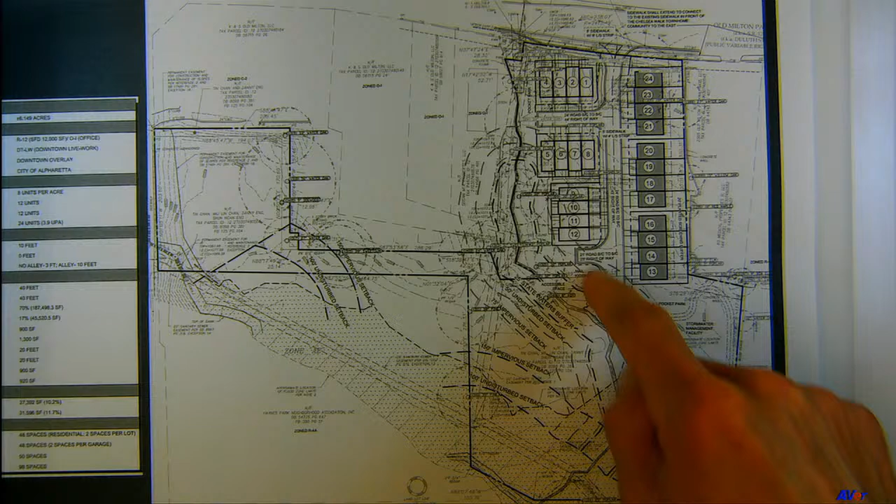So let me see if I can... okay, if you're looking at it here, so we set aside this area and this area and this area, all can essentially be pocket parks. To give you an idea, this unit here in terms of size is roughly 20 by 50, so that's roughly 1,000 square feet. So if you look at this area, this would be about 2,000 square feet, a little bigger than this.

If you're looking at this area down here, we think that can be a combination of creating a little bio area, more of a rain garden, but also making it a park feel. This area down here is more like 4,000 square feet, double this as we've been looking at it. And the area out here where we can fit a fire pit and the mail kiosk, this together is roughly about 2,800 to 3,000 square feet that we've looked at.

Now, where we're talking about coming down, taking the sidewalk around here, this area and this area, where we can have this respite that's very well treed and away from the noise because it sits down below Old Milton, it's just a little bit of a different feeling area. This area outside of the buffer alone is upwards of about 8,000 to 10,000 square feet, and the area here is almost the same, to give you an idea of the areas.

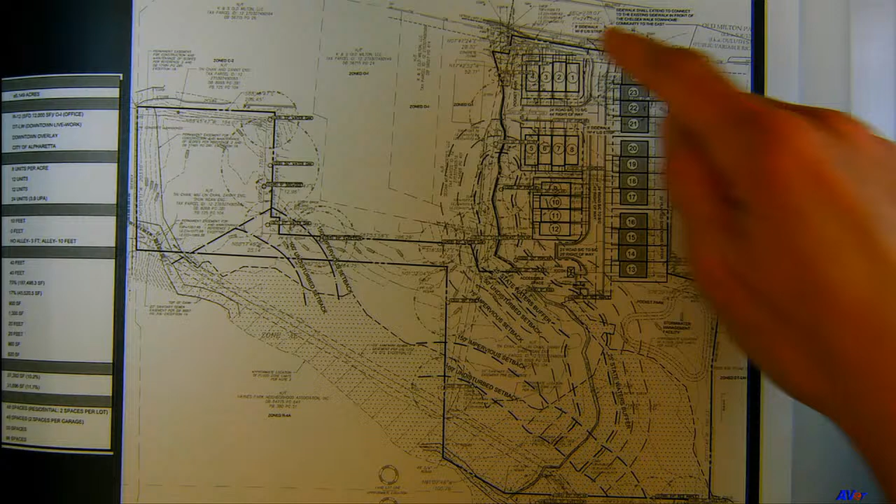And so the walking trail would kind of snake through that dog leg? We're thinking it comes right across. Sorry, yeah, so the idea would be it comes right across, and this would be one area, but we'd also be able to loop the pond and tie it back and come across through here. So essentially your Civic would be through here, come across the pond, and then be able to get back up and have that link all the way down to Chelsea Walk.

I love everything the gentleman just said, but as we get a week out from here, a month out, 3 months out, people are going to forget all these 3 different areas of pocket parks, the sizes, and the walking trail and where it is. Some people might forget about it altogether. I don't know if the site plan needs that imprint a little tighter and more specific, but otherwise I like what you said.

We'd be fine if you guys are agreeable to have some type of recommendation from you, within the next time frame, that we have to be able to show and present based on what we said. Even if all of those were just overlaid in red here so you can kind of see the boundaries. And if you had a legend with those square footages you mentioned, I think that would be helpful, especially when you go to council. Yeah, absolutely, I totally get it.

Thank you. I think we've seen enough of these stormwater management facilities now. We know they're subject to final studies, right? I had no idea there was another park on this, honestly. So I just think that clarity between now and the next meeting, just real simple to do.

Awesome, thank you, those are great comments. I had one last question about the stormwater runoff. In the citizen community information meeting, one of their questions or concerns was the flooding. You addressed that, you said you're lower. Did these people at the community information meeting either not get that communicated to them, or?

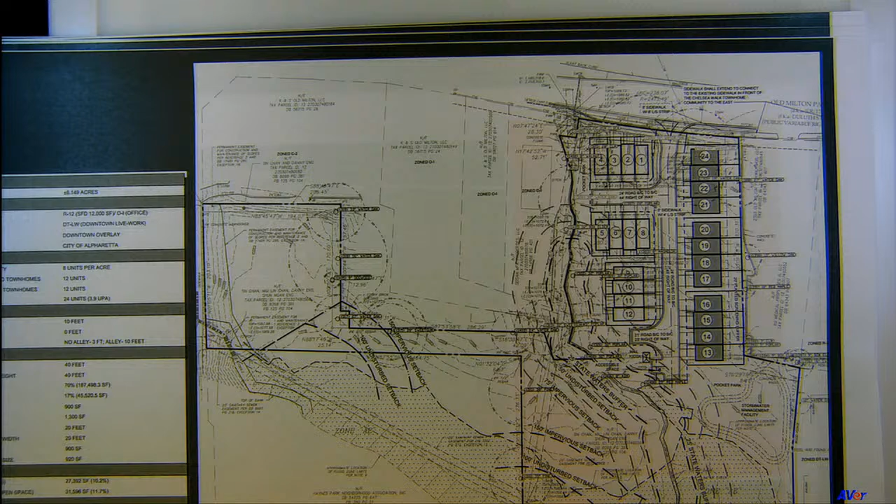All right, there are no further questions. We're going to open this meeting for public comments, and then you have some time to say something before I turn it over to the board. Anyone who would like to speak in favor of this application, please come forward.

We have one at the back. To this microphone, please state your name and address for the record. Yes, hi, my name is Michelle O'Brien. I'm a resident of the Haynes Park Townhomes at 205 Nottaway Lane, Alpharetta, Georgia, 30009.

Having reviewed this plan ahead of this meeting and hearing some of the comments today, a couple things I just wanted to say briefly. One, overall I think I'm in support of the development. I think it's well thought out. I think the design of the homes matches the feel of the downtown historic area. And I think they've been very thoughtful in terms of the plan, and a lot of the setbacks don't really impact our community.

I would also agree in terms of wanting to see if there was anything going forward with that parcel off Haynes Bridge Road. I don't think that just goes to the council, I think it has to come back to yourselves to re-review it, because there's obviously a level of thoroughness I would like to see addressed. Also, having walked past that, it's really, really steep.